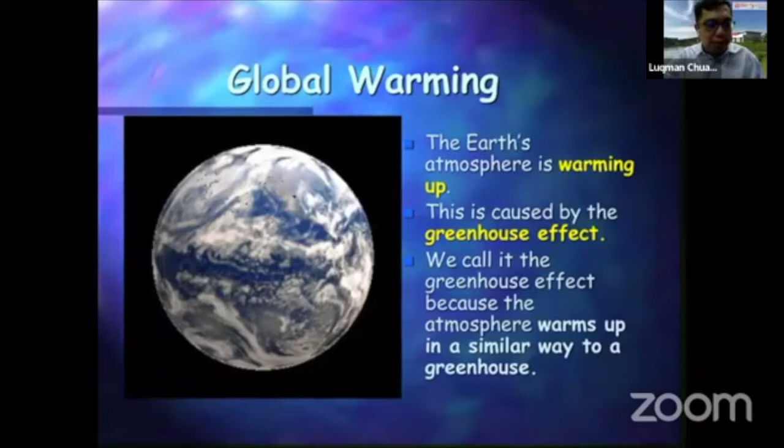For the last 100 years, icebergs seldom melted. But now the rate of melting in Antarctica and the Arctic is faster than we can imagine. It's predicted that in the next 50 years, we might not have any ice during summer in the Antarctic and Arctic areas. This is quite worrying.

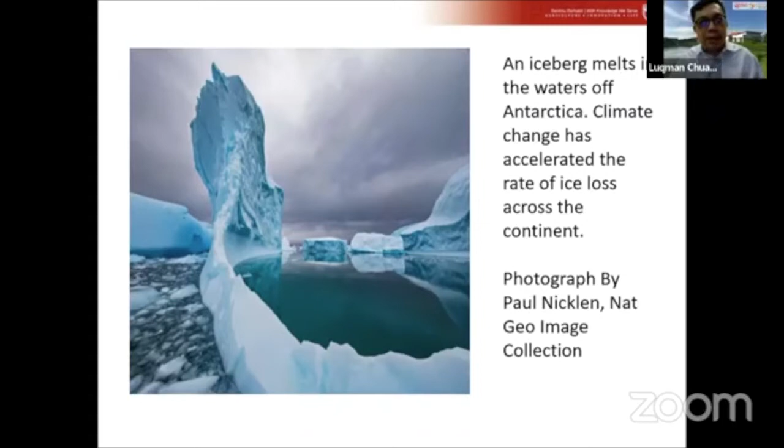This picture also shows that in the high plains of Bolivia, a man surveys the remains of what was the country's second largest lake. You can see it's completely dried out. Lake Poopó dried out due to drought and management issues.

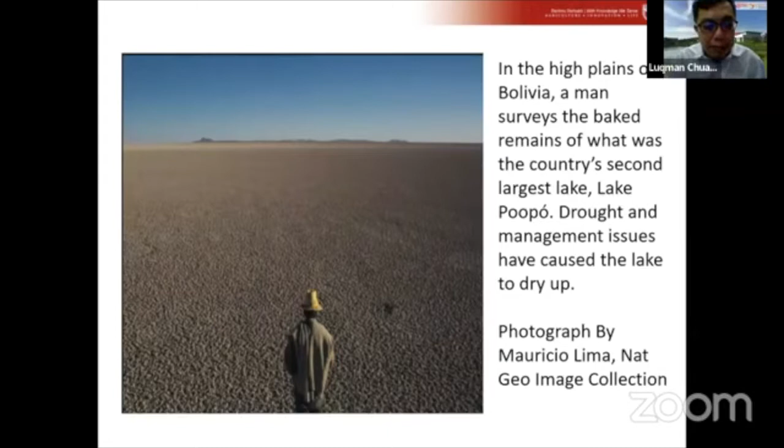I always like to share this with my students when teaching atmospheric risk management courses. You can see climate change impacting the flora and fauna in the Arctic. Although scientists don't know specifically what killed this individual polar bear, experts warn that many bears are having trouble finding food as sea ice historically relied upon melts earlier.

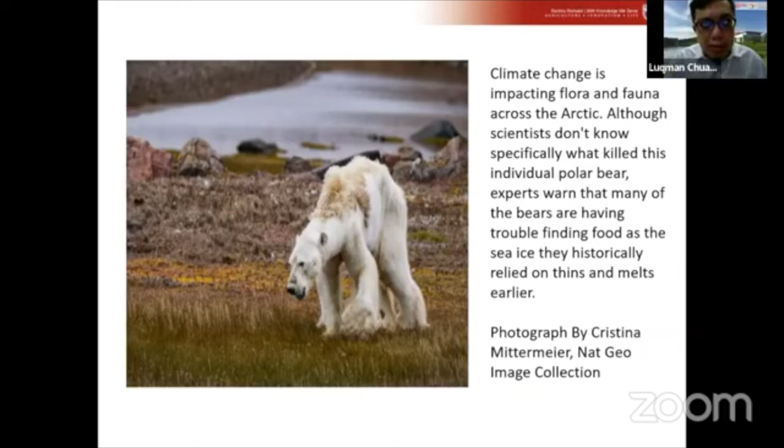I think the food shortage not only affects animals, but in the future might also affect mankind. We are in trouble if we don't try to do something for Mother Earth. Other than that, forest fires, long droughts, and super cyclones are all caused by global warming and climate change.

These things give us a warning, ringing a bell that we should conserve our environment, especially by reducing carbon dioxide emissions to reduce the effect of global warming.

So my focus today is on the aerospace industry, an industry that also contributes hugely to carbon dioxide emissions. As general background, the aerospace industry is a gigantic sector which supports nearly 62.7 million jobs, directly or indirectly, and generates about $2.7 trillion in gross domestic product.

It's also forecasted that the aerospace industry will support more than 99 million jobs, direct and indirect, with GDP estimated at about 5.9 trillion in the next two decades. Of course, if we account for the effect caused by COVID-19, it might be slowed down at the moment, but if things return to normal, this is what we forecast will happen.

So let's look at our area, the Asia Pacific region. It's at about 6% compound annual growth rate between 2018 to 2037, estimated by a study from Airbus.

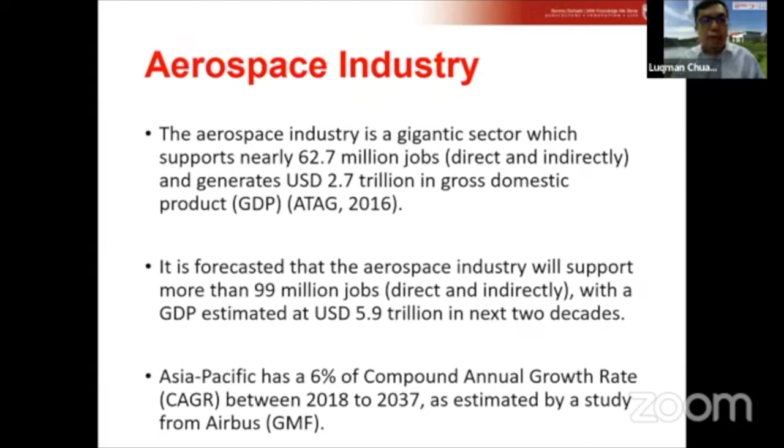Here, the picture shows the air traffic data on revenue passenger kilometers over time, with future predictions by Airbus. Air traffic is expected to double in the next 15 years, and over 20 years, an annual traffic growth of 4.8% is predicted, so the industry will keep growing and booming in the future, with more people using air traffic as a mode of transportation.

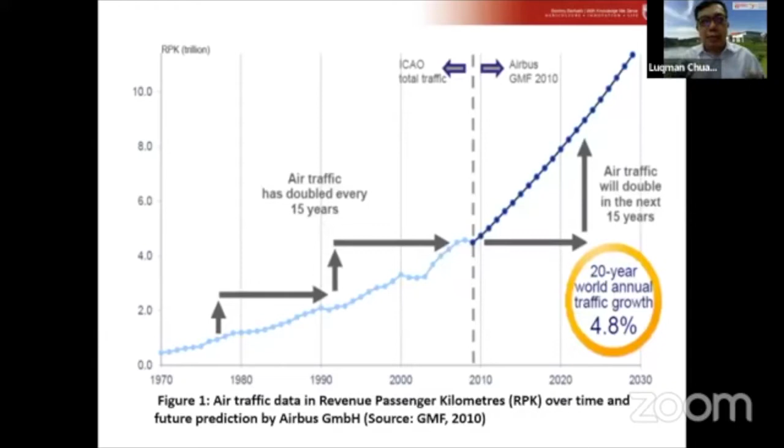What about the Malaysia scenario? For Malaysia, the strengthening of its manufacturing supply chain and maintenance services are undergoing transformation with Industry 4.0 as a catalyst. However, environmental accountability still lags behind in the Malaysian aerospace industry, even with the tremendous growth due to low-cost carriers such as AirAsia, Firefly, Tiger Airways, Malindo, and Jetstar. This is a concerning issue because as Malaysians, the industry and public still lack awareness of the environmental impact caused by the aviation industry.

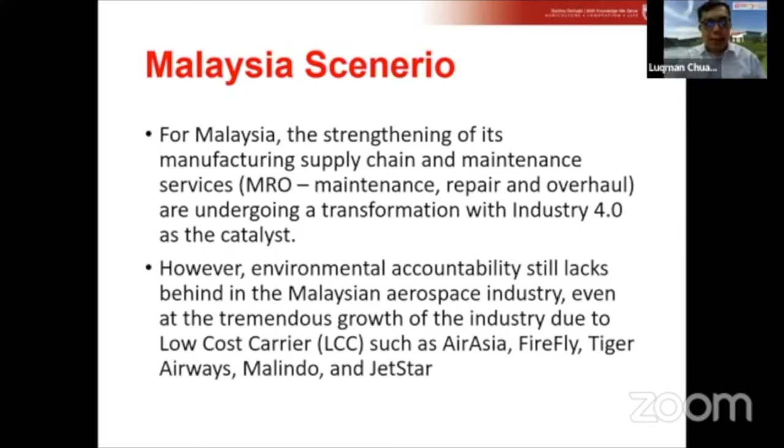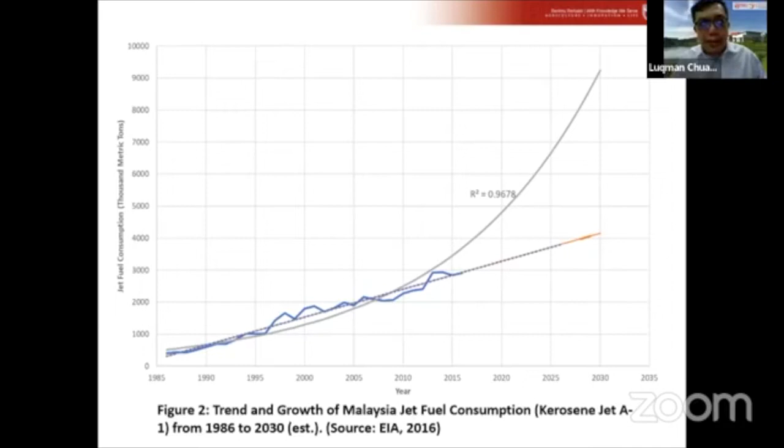So what's the relationship between the aviation industry and carbon emission? Aviation accounts for roughly about 2% of man-made carbon emissions globally. Global production of aviation fuel, particularly kerosene Jet A1, had a market presence of 80 billion gallons per year, or 302.8 billion liters per year.

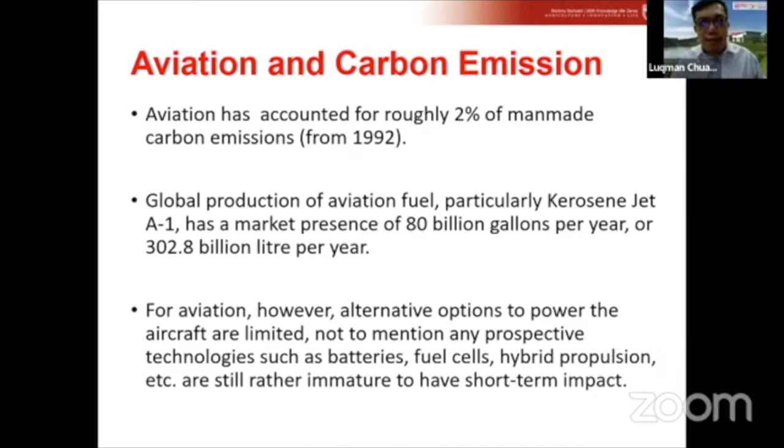For aviation, however, alternative options to power the aircraft are limited. This is sad news, we don't have much choice, we have to use fossil fuel. Not to mention prospective technologies such as batteries, fuel cells, hybrid propulsion, and so on, which are still rather immature to have a short-term impact. There's a lot of research working on that, such as fuel cells using hydrogen power, batteries, and hybrid propulsion. However, this technology is still under development and in the R&D stage. It's not established or mature enough to totally replace conventional fossil fuel, the conventional jet fuel which is kerosene.

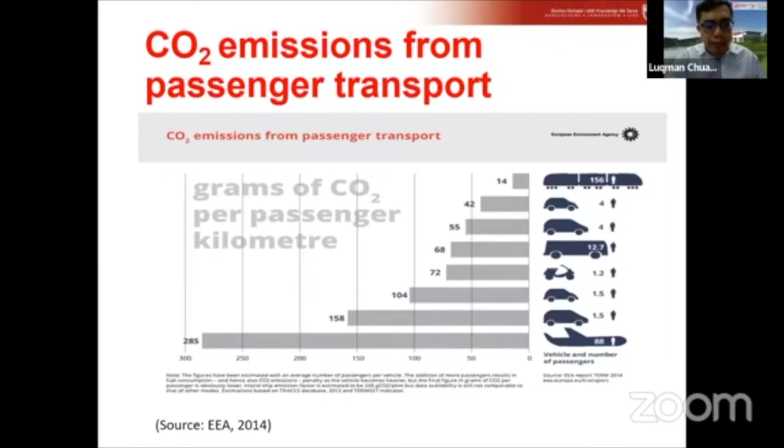So carbon offsetting and reduction scheme for international aviation, simply called CORSIA, is a global initiative by the United Nations to address and offset aviation emissions through offset credit and allowance from an emission trading scheme. Malaysia has pledged itself toward CORSIA, with implementation phase in 2020. This is the Malaysian initiative trying to cut down carbon emissions in the aviation industry. Malaysia has joined force in CORSIA trying to reduce carbon emission, and it's imperative that Malaysia have offset credit to address aviation emission.

One such credit gain could be the utilization of BioJet fuel. It is obliged by the Malaysian government, especially to address the issue of carbon emission by the aviation industry. So one of the measures that the Malaysian government can take is to utilize BioJet fuel to replace the conventional fossil fuel, kerosene, which is used on the airplane.

So basically, there are some challenges to aviation jet fuel. During the Aviation and Environment Summit organized by the Air Transport Action Group in 2008, aviation leaders across the globe committed to an industrial long-term plan to improve its carbon footprint. That's not new, the aviation industry has had attention on the carbon footprint produced by the airplane and the aviation industry. Leaders of the aviation industry came together to discuss solutions and measures they can take to reduce carbon emission. The aviation carbon dioxide roadmap pledged the aviation industry to reduce emission of carbon dioxide, nitrogen oxide, and noise.

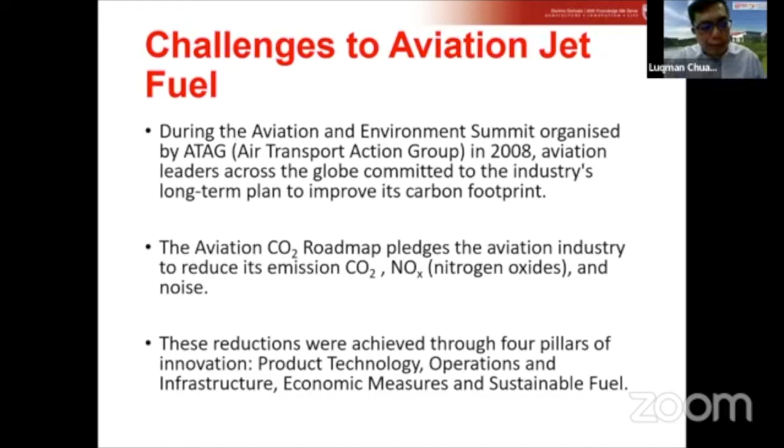Today our presentation will focus more on sustainable fuel. Here is the 4-pillar reduction roadmap.

The forecast reflects different measures and recent actions taken. So what happens to carbon reduction? As you can see, if no action is taken and it's business as usual, carbon emissions will keep rising.

Emissions are expected to reach a peak by year 2050. But if measures are taken, such as using biofuel together with other technologies,

these measures can be successful. It's predicted that we can successfully reduce carbon emissions by 50% by year 2050.

This is what we hope to see, because if we do nothing, we will leave the global temperature to increase by 2 degrees Celsius.

This is something scientists don't want to see, because a 2 degree Celsius increase will cause a lot of damage to the ecosystem and to our Mother Earth.

So we can see that it's very urgent that we need to control our carbon emissions by 2050.

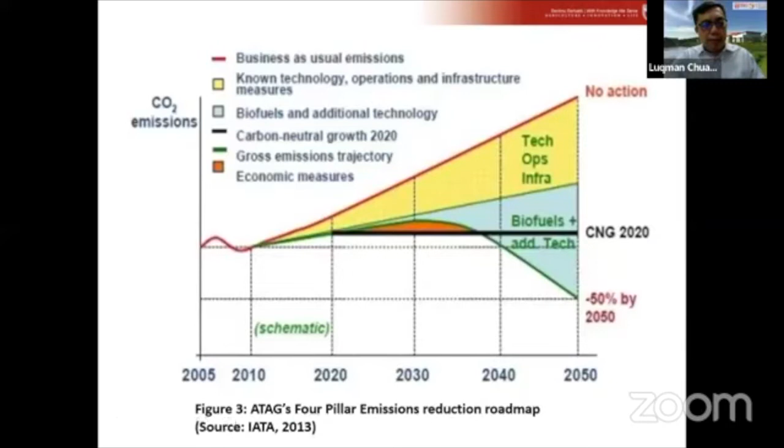Seeing that biofuel or alternative fuel might be an option to reduce carbon dioxide, it's gaining attention in the aviation industry, which is focused on replacing the current fuels used by airplanes.

The evolution from 2007 to 2017 in the biojet fuel arena can be segmented into upstream and downstream momentums. The upstream looks at biomass feedstock possible to produce biojet fuel and how this resource can be developed at mass scale.

This is very important. Unlike cars or road transportation, where fuel consumption is not as huge,

for long distance traveling, jet fuel carrying more passengers and heavier loads has huge consumption. So we have to make sure the supply and feedstock for biofuel are enough to sustain the industry.

So the upstream industry is very focused on ensuring the feedstock supply is enough to sustain the production of biojet fuel.

The upstream also looks at conditioning this feedstock to enable production of biojet fuel, including energy densification, biomass treatment, conversion to oil, conversion to intermediate products, and storage.

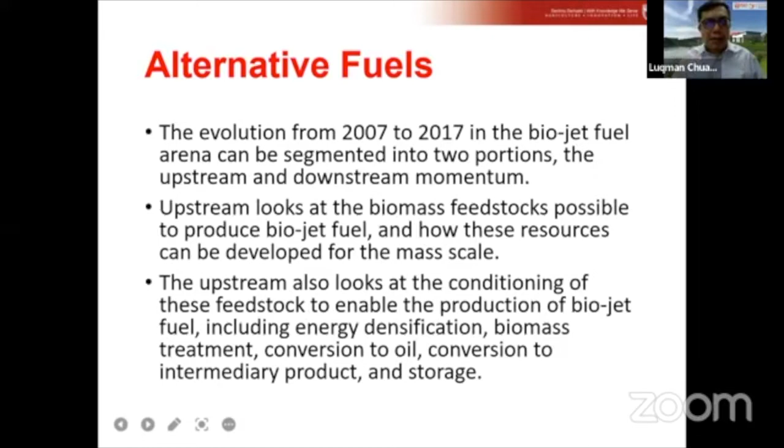For downstream, they look at oil refinery, converting intermediate products into the final form, jet fuel, along with product blending, marketing of the fuel, and certification.

Upstream ensures production of crop and biomass is enough to supply to the refinery, which converts it into jet fuel.

Downstream is more focused on conversion technology of jet fuel, and also quality control,

and certification of biojet fuel. These things are the focus of the downstream industry in biojet fuel.

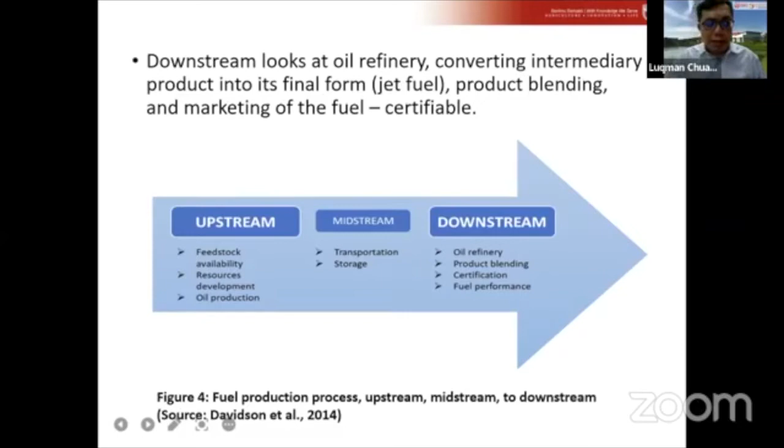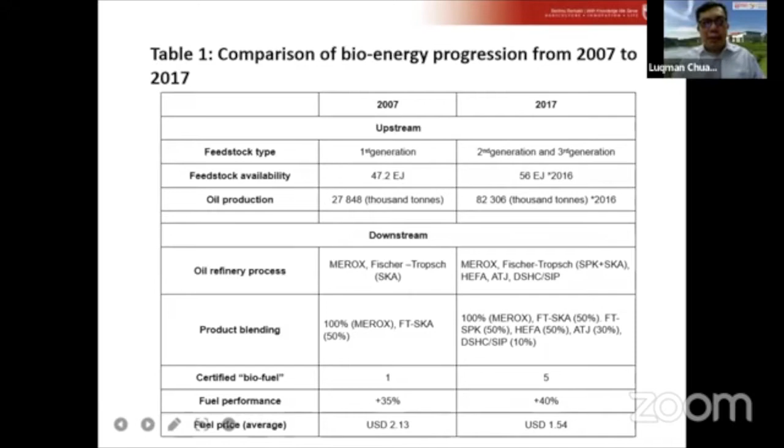Although there are currently many biojet fuels that have been developed, they also have advantages and disadvantages as compared to conventional fuel. However, this can be overcome in the future when the technology is further improved.

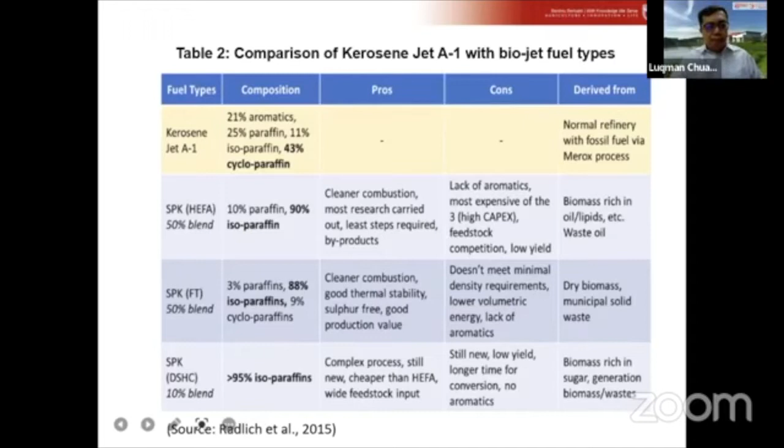These undergo the biological process. The process of conversion can go through the biological process, chemical process, thermal process, and others. More detail will be discussed in a later slide. You can take a glance that there are various alternate pathways to convert the biomass into biojet fuel.

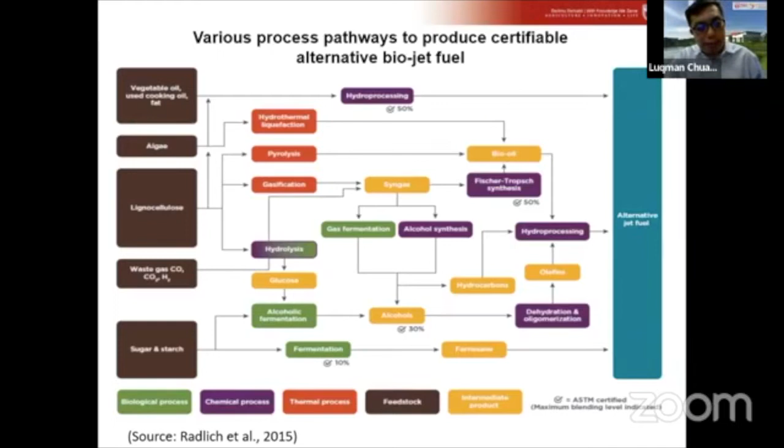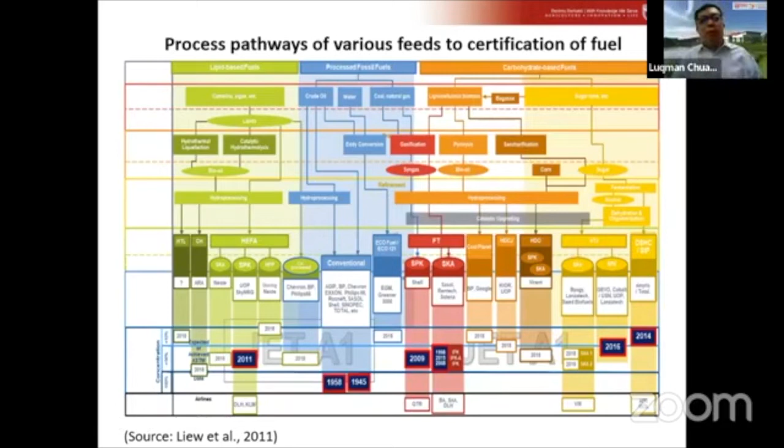This diagram shows the different processes that can produce biojet fuel. We will discuss the rest in more detail, but just to give you a general idea: there are various processes such as hydrothermal liquefaction, catalytic hydrothermolysis, eddy conversion, gasification, pyrolysis, and saccharification, which produce different types of biojet fuel.

So what is the benefit we can obtain from alternative fuel? The alternative fuel has the benefit of reducing the environmental footprint of the aviation industry, basically carbon dioxide, sulfur emission, particulate matter, and so on. It also improves flight performance, with better fuel burn efficiency and energy content.

Besides energy security and sustainability - you know that fossil fuel, the petroleum, will one day deplete. So plant-based or biomass-based fuel is more sustainable and long-lasting, which will guarantee the sustainability of the supply of biojet fuel, along with price stability compared to the depleting fossil oil reserve.

You can see that currently the oil price, due to the Ukraine war and Russia, has increased. So by replacing it with alternative fuel, we can actually bring down the dependence on fossil fuel, and indirectly bring down the price of fuel as well.

Lastly, the utilization of current standing infrastructure - the conversion to biojet fuel doesn't need to build new facilities. It can actually be based on the current facility, the current refinery plant, with just some modification, and it can be utilized to convert into biojet fuel production.

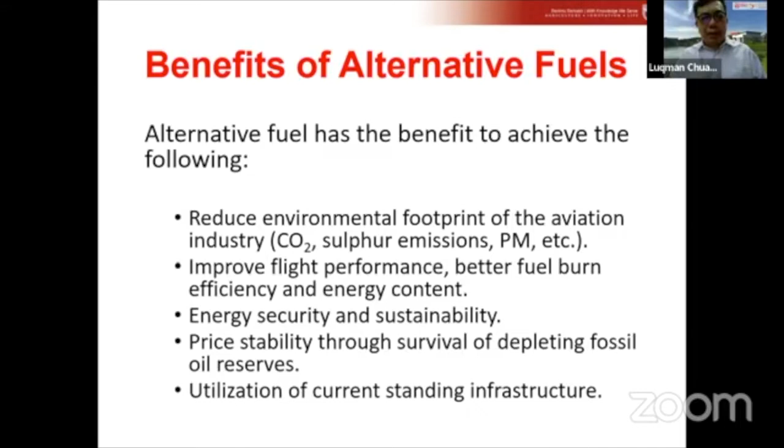This is also another advantage of using biojet fuel. We can foresee that the performance of the engine will also be improved with cleaner combustion.

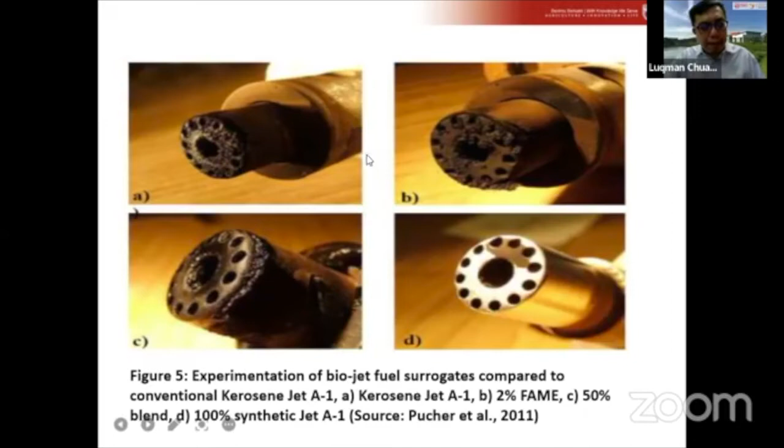Before the MCO, before the COVID-19 pandemic outbreak, AirAsia had communicated with Airbus, trying to discuss the potential of using BioJet fuel in their airplanes, because Malaysia is also bound by the Paris agreement. So AirAsia will also be affected by 2020, 2030, by how many percent of the jet fuel has to consist of BioJet fuel. So AirAsia, Malaysia Airlines, they start considering how to implement the blend of BioJet fuel into the fuel system.

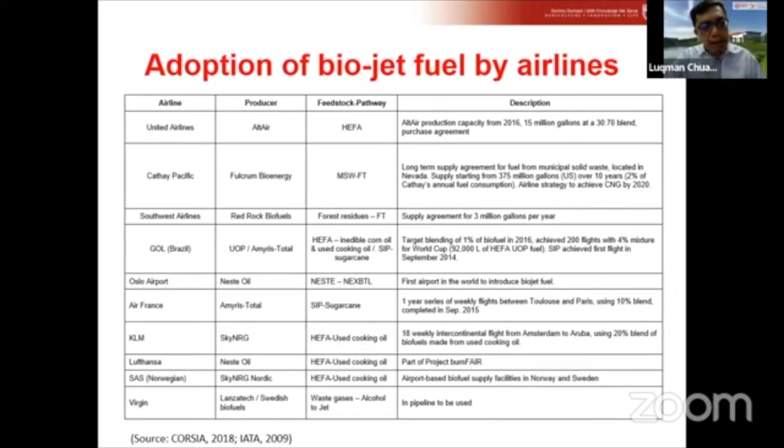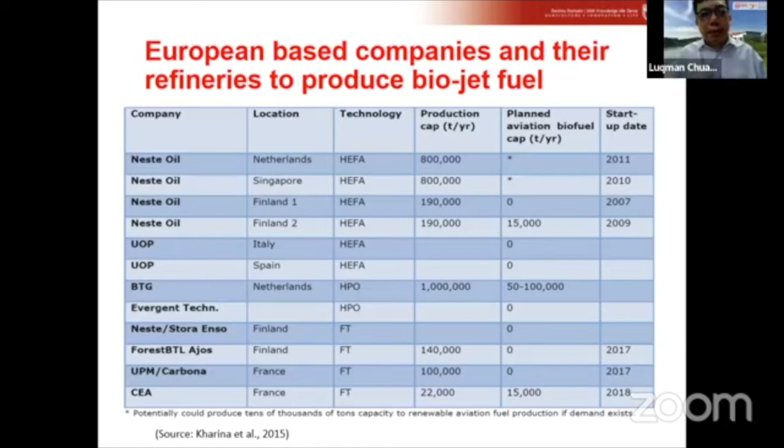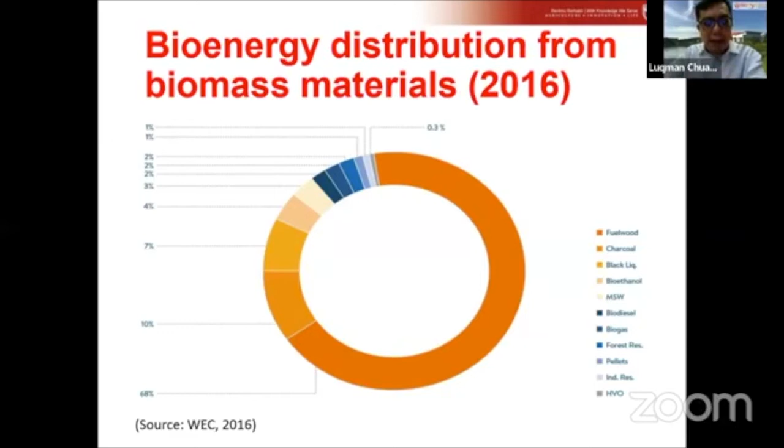But there's potential in HVO that we'll discuss later. Currently, most of the biomass feedstock consists of lignocellulose base. You can see that almost 68% of the bioenergy feedstock actually comes from fuel wood, which is lignocellulose based.

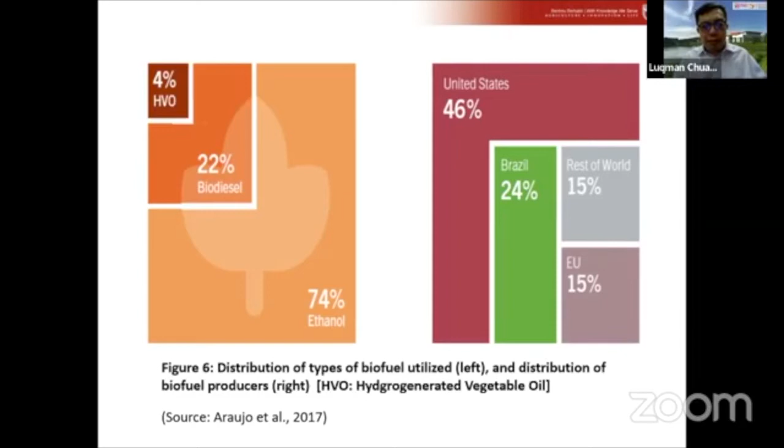This shows the distribution of the type of biofuel utilized, and the distribution of biofuel producers on the right. You can see that most of the biofuel currently utilized is ethanol, which consists of about 74% of the biofuel, and only 4% is HVO, hydrogenated vegetable oil. The United States seems to be the biggest player in utilizing biofuel energy compared to the rest of the world.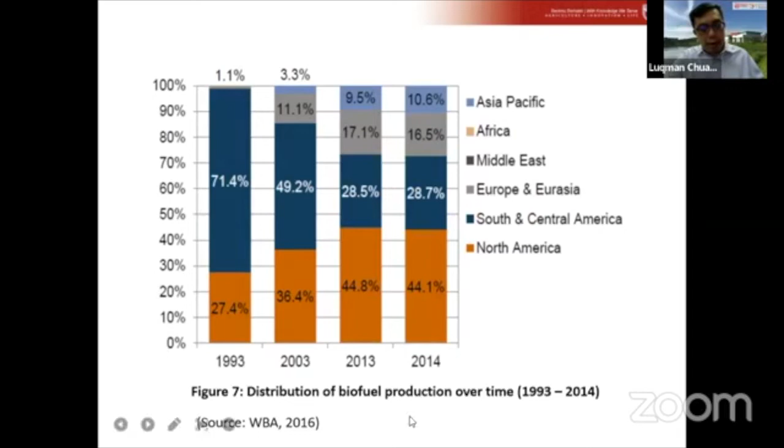So how about Malaysia? Malaysia is a country full of natural resources, so it can be assumed that Malaysia is a heaven or paradise for biomass feedstock. Biomass in Malaysia consists of various categories, such as permanent crops and trees.

This includes rubber, oil palm, coconut, cocoa, coffee, areca nut varieties, orchard; short-term crops like banana fiber, fiber crops, pineapple, paddy, grass, nursery, tobacco, sugarcane; horticulture land, mixed horticulture, vegetable, oil, herbal and spices; forest land, log piles, ex-log piles, forest residues, shrubland; and others like micro and macro algae, animal farm waste like cow dung, and municipal waste. All these are potential feedstock that can be used to convert into BioJet fuel.

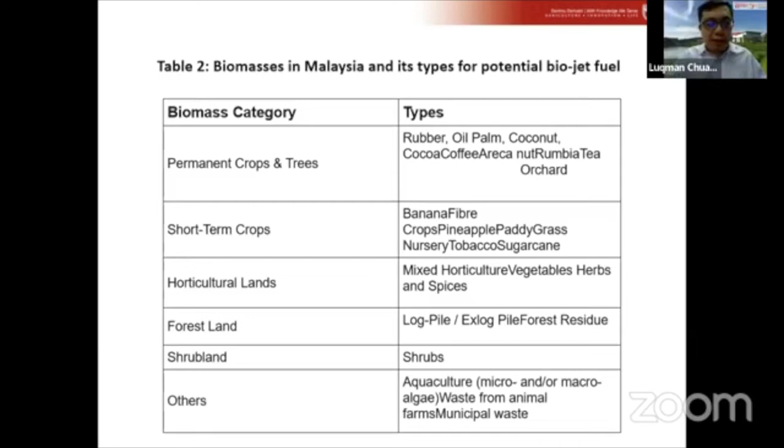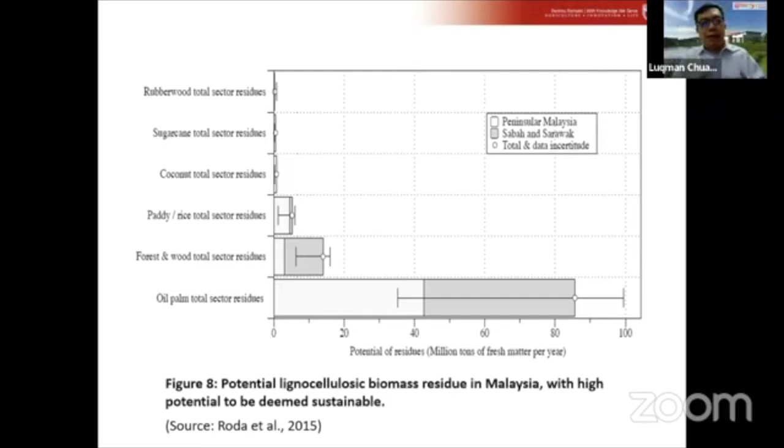So here's the diagram showing the potential lignocellulose biomass residue in Malaysia with high potential to deem sustainability. Among the biofeedstock mentioned earlier, oil palm seems to be the biggest biomass with potential to produce biofuel and bioenergy for the industry, so our focus might be on the biomass from palm oil. From the study, compared to other feedstock, the residue from the palm oil industry stands out as the highest feedstock available in Malaysia.

So we make a matrix against the sustainability criteria. We compare palm oil, forest resources, paddy, rubber, sugarcane, coconut residue, and palm oil seems to be the most promising feedstock for biofuel. They are friendly on land area because of their high yield per hectare, and they also have residue availability, government support, incentives, poverty alleviation, and much lesser logistic difficulty compared to other industries. So all these criteria make palm oil residue an ideal feedstock for bioenergy.

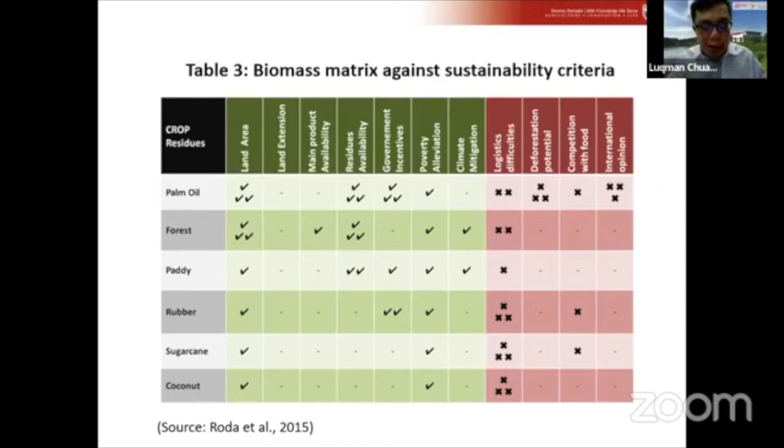It is able to compare the various sustainable local feedstocks, their respective potential of dry biomass, and the BioJet fuel potential. As you can see, oil palm seems to be the most promising because it has the highest potential biofuel production compared to other feedstocks such as rubber, sugarcane, coconut, paddy, and forest residue.

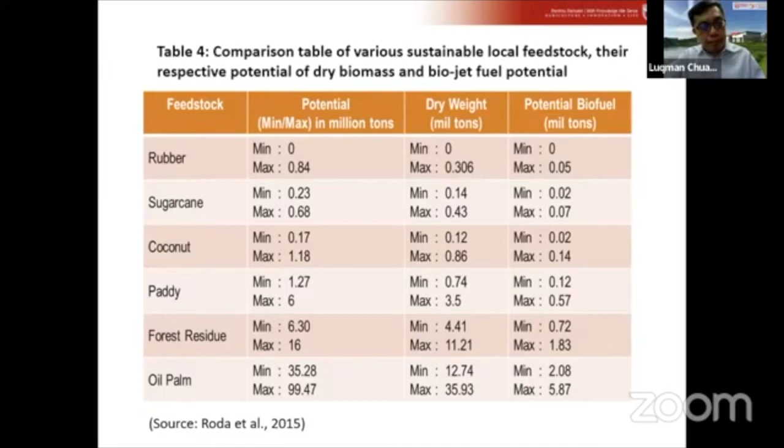Talking about liquefied fuel, here we present a selected oil and the respective yield and area required by the global fuel demand. We compare microalgae, oil palm, canola, sunflower, jatropha, and soybean.

Microalgae seems very promising since it has the highest oil yield and requires the least area for the global fuel demand compared to other feedstock. However, oil palm also stands at the second most potential feedstock for biofuel production. We will discuss these two feedstocks in the later slide.

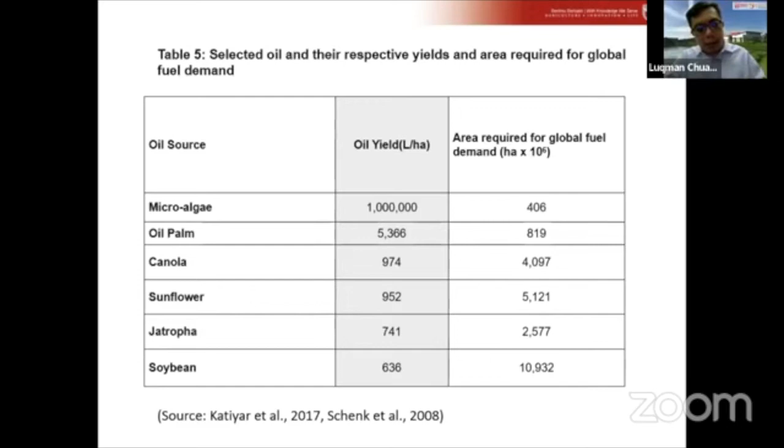Malaysia has once considered microalgae as a potential feedstock for biofuel oil. There's a lot of research carried out by University of Malaysia, TNB Research, and various research institutions on microalgae. However, most of the technology is still under development. We will discuss the limitations, pros and cons of using this feedstock.

The first generation feedstock are basically from biomass that is considered food, which is why there's the issue of biomass being used for fuel or for food. So for the second generation, we try to switch to feedstock that is non-food based. The third generation relies entirely on algae-based biofuel and bioproduct, and the fourth generation looks at non-biomass-destructive solutions such as electrofuel and photobiological solar fuel. Most of the research currently is on the second and third generation, which we can consider relatively more matured compared to the fourth generation fuel.

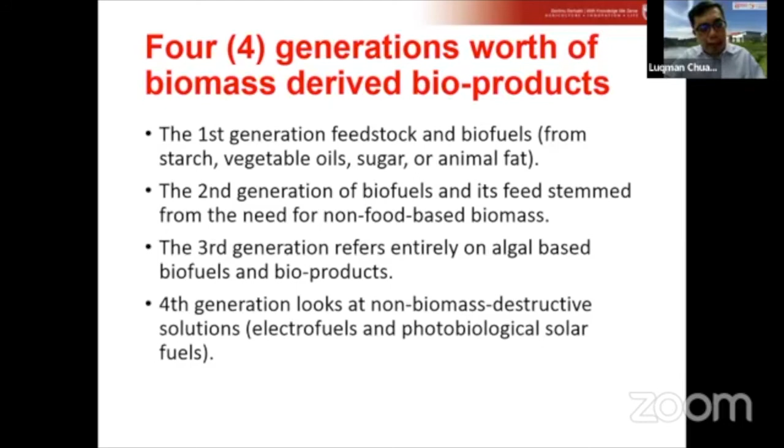So first generation accounts for the rise in food and animal feed prices, has a negative impact on biodiversity, and also competes for water due to the size of land required for the crop to grow. For the second generation, it provides an alternative to the food versus fuel debate. However, it has its own issues to address, such as the extraction process from biomass like sugar, which is locked by lignin, hemicellulose, and cellulose.

For the third generation, or algae-derived fuel, the major disadvantage is the requirement of large-scale industrialization of the algae plant, with other disadvantages involving the balance between product for fuel and high-value co-products, and harvesting, dewatering, and extraction cost of the oil for the algae. So each generation of feedstock has its own limitations.

They also have the advantage and the limitation to each of them. So our focus is more on the second generation. Although the third generation algae and microalgae seem to be a promising feedstock, however, considering the high cost and competition of the value products that can be extracted from the algae, it's not the current consideration to make use of microalgae.

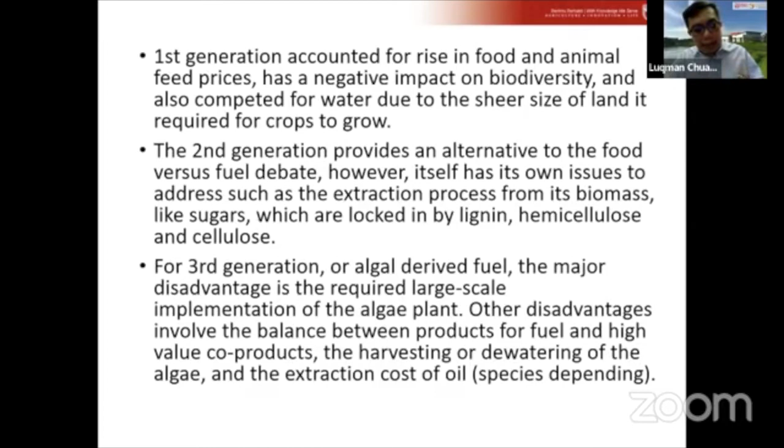Because they are also still facing some technical difficulty to extract the oil, to ensure that the harvesting process can be successfully implemented.

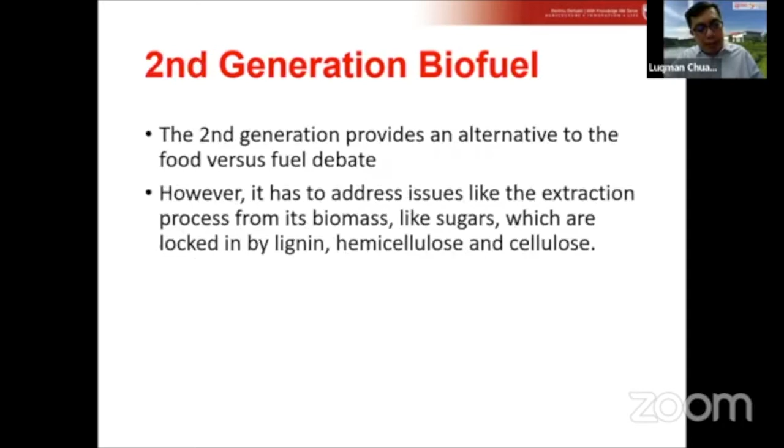So first generation accounts for the rise in food and animal feedstock competition. They have negative impact, this one we already mentioned. So basically this is the pathway of the biomass product.

So we have seen the challenges faced by the aviation industry by using BioJet fuel. So how about the potential conversion pathway? The conversion pathway means converting the feedstock into an intermediate product, then into the product, which is BioJet fuel. This consists of the feedstock, basically from crops or crop residues, to produce an intermediate product such as sugar, biofuel, bio-oil, and intermediate chemical, then as an end product, the BioJet fuel or other chemicals.

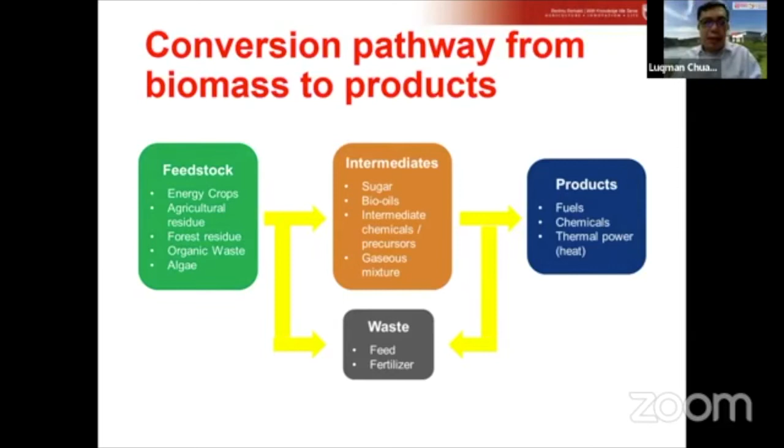So basically there are two major conversion pathways. One is biochemical, and secondly, thermochemical conversion.

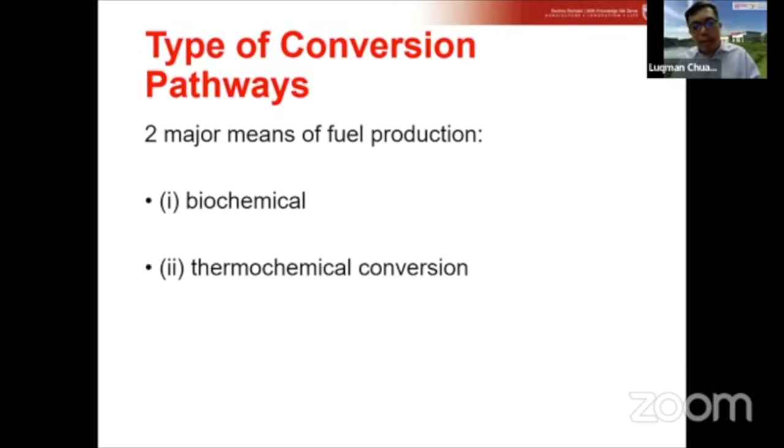Biochemical conversion involves the use of biological agents, usually naturally occurring microorganisms, to convert biomass organic components into liquid fuel, transportation fuel, and gaseous fuel. The common biochemical conversion is fermentation for ethanol, which is basically the first generation technology. In the very early stage of biofuel, people were converting crops such as corn into bioethanol. These are the very early stages of biofuel.

Biomass residue first undergoes hydrolysis or saccharification to convert the cellulose component into simple sugar. Enzyme and/or yeast are then added to convert the sugar into ethanol. So this is a very first generation technology.

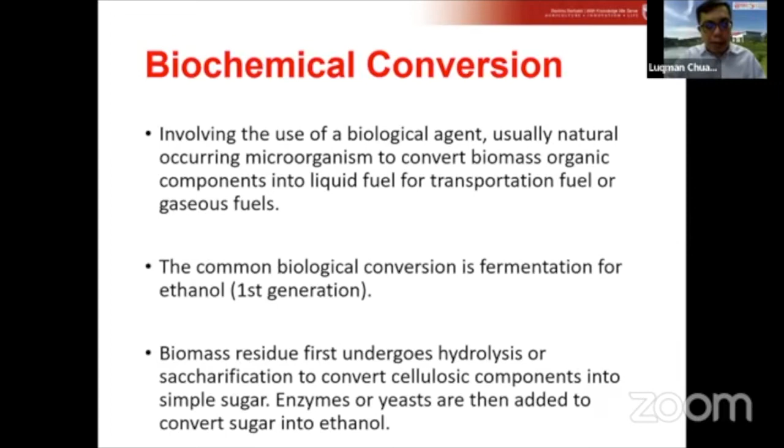We will go through the biochemical conversion process. Basically, the process consists of lignocellulose - the fiber, the plant fiber, the crop fiber - which can actually be converted through pre-treatment: washing, separating, pulping, then extracting the lignin and also extracting the cellulose. They then go through the hydrolysis process by enzyme or bacteria, converting into sugar. Then the sugar will further ferment into ethanol, bioethanol, biomethanol, or other products. So these are basically the process, the description of the process.

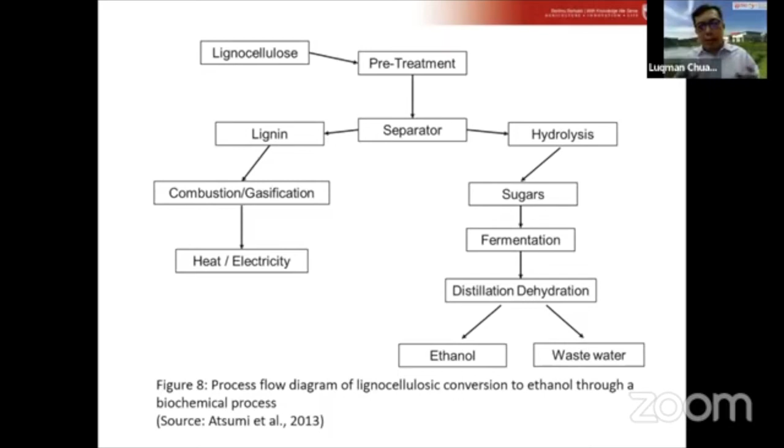The other conversion process is thermochemical, involving the process of subjecting biomass residue to elevated temperature, an irreversible reaction where biomass components are converted into various high energy components in the form of solid, liquid, and gaseous. This process can consist of pyrolysis, which converts the biomass with heat into charcoal, gas, and oil, which is also fuel. Or it can go through the gasification process where biomass is gasified under limited oxygen supply, made into fuel gas and/or syngas for the combustion process later. Or it goes through the combustion process where hot combusted product will be produced. So this is the conventional pathway to produce biofuel.

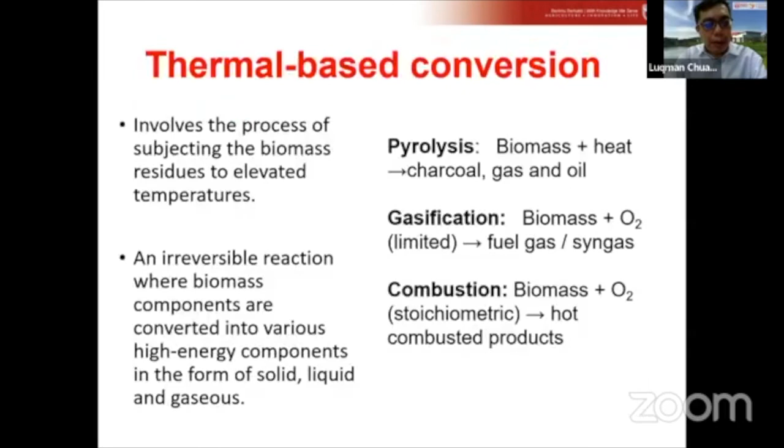Before we study the potential pathway, we first look into the criteria requested by CORSIA sustainability. So what are the CORSIA sustainability criteria for CORSIA eligible fuel? Before we need to produce BioJet fuel which fulfills the requirement under the CORSIA agreement, we first need to understand what aspects are highlighted by CORSIA for BioJet fuel.

The technical design criteria consist of high-performance fuel that can withstand a wide range of operating conditions, and also fuel that can meet the characteristics of conventional jet fuel for aviation with no requirement for different airframe, engine, or logistic infrastructure - a drop-in fuel, meaning you can directly use the fuel in the engine without major modification. Also the fuel must meet or exceed current jet fuel specifications, ASTM D1655 and ASTM D7566.

For the sustainability design criteria, it consists of life cycle greenhouse gas emission reduction, so they have to make sure there's a reduction in greenhouse gas in the long term. Also limited freshwater requirement and no competition with needed food production. From here, you can see that the first generation feedstock will be phased out because they face competition with food. So the focus will be more on the second generation or third generation feedstock.

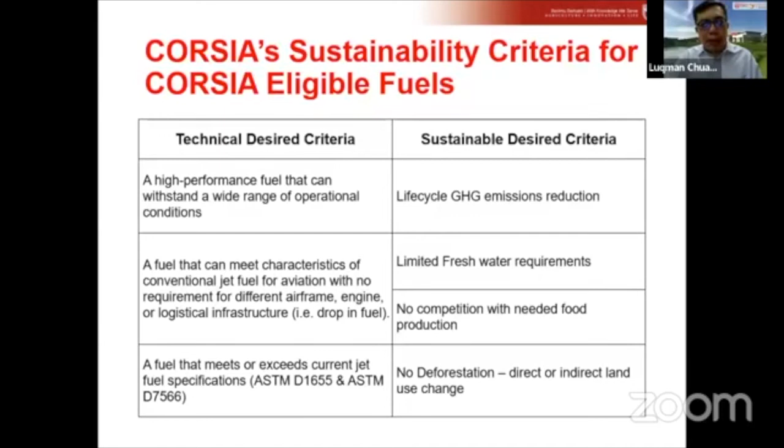I would like to present the 4 potential pathways to produce aviation turbine jet fuel. Before we determine which pathway is most suitable for biojet fuel to be utilized in Malaysia, I would like to introduce the 4 pathways that can convert to biojet fuel. First is Fischer-Tropsch, followed by hydroprocessed ester and fatty acid, or HEFA, sugar to synthetic iso-paraffin (SIP), and alcohol to jet (ATJ). These are the conversion pathways to biojet fuel currently available for production.

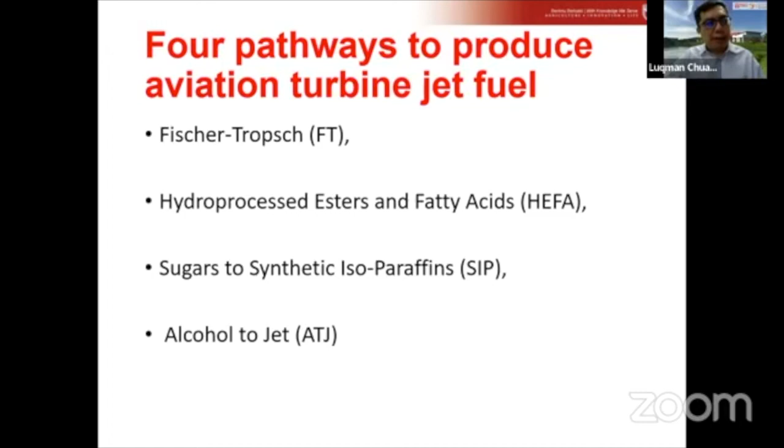Hydroprocessed ester and fatty acid, or HEFA, was approved in July 2011 under ASTM D7566 for use up to 50% of volume in blend with conventional kerosene jet fuel. This is a tested and proven method approved by ASTM, the American Society for Testing and Materials Standard. The input feedstock of HEFA is mainly based on lipid-based feedstock, such as vegetable oil, animal oil, cooking oil, and etc.

An advantage of this process is it can be easily integrated into the current oil refining process. Integration into the oil refinery will ease the market entry point from a price, return of investment, speed, and reliability perspective, making it highly economical. This is good news for industry players, because they don't need a big investment, since they can use current facilities to convert feedstock into biojet fuel. This means they can have a more competitive price, more profit, and faster return of investment. This is encouraging news for biojet fuel manufacturers.

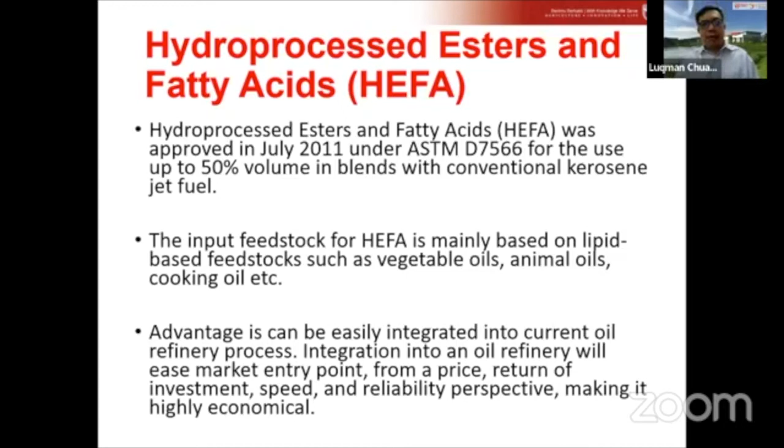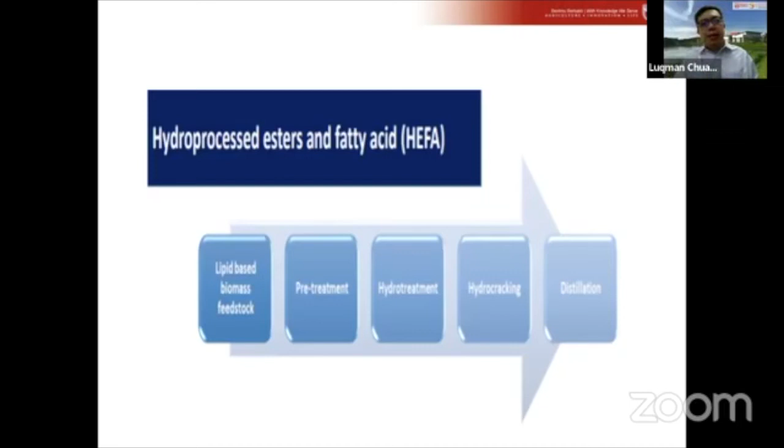So how about the other technology? Here is a basic diagram showing the pathway of HEFA. Basically, the lipid-based biomass feedstock using oil and fat will undergo pre-treatment, such as degumming, followed by hydro treatment, hydrocracking, and then distillation to produce jet fuel.

Fischer-Tropsch is a technology usually used in oil refineries, especially in the petroleum cracking process. However, it is also utilized in biojet fuel production. The Fischer-Tropsch conversion process was approved in September 2009 under ASTM D7566 for commercial use at 50% blend with conventional kerosene jet fuel across the world. This is another approved method for biojet fuel production.

Fischer-Tropsch fuels are known as Fischer-Tropsch synthetic paraffin kerosene, or Fischer-Tropsch synthetic paraffin kerosene with aromatics. As pyrolysis does not yield the desired liquid fuel, most of the Fischer-Tropsch process for fuel is done with gasification of coal, natural gas, and biomass feedstock. In this process, the feedstock is slightly different compared to HEFA. The feedstock basically consists of solid or gaseous feedstock, as compared to HEFA, which uses liquid feedstock.

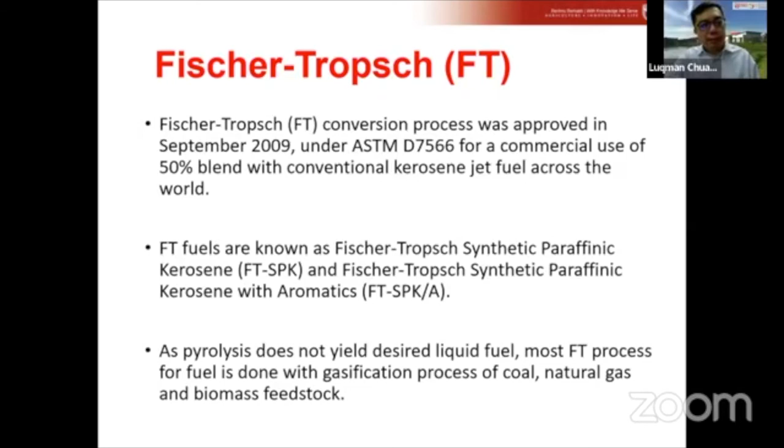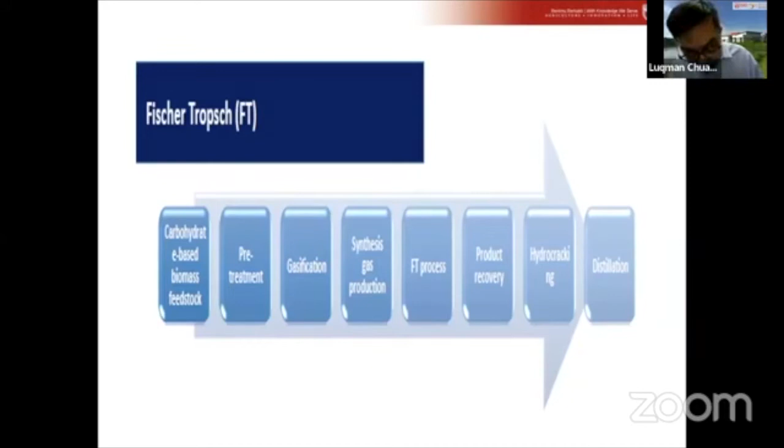This is the route of the Fischer-Tropsch process. The carbohydrate-based biomass feedstock will undergo pre-treatment, then gasification to produce synthetic gas, or syngas, then the Fischer-Tropsch process, then product recovery and hydrocracking, then distillation. The last few stages are quite similar to HEFA.

ATJ, or alcohol to jet, was approved under ASTM D7566 in 2018 recently. It was initially approved for 30% and revised to be approved up to a blend ratio of 50% with conventional jet fuel. One of the key benefits of ATJ is that it can convert any low-cost, locally available feedstock into ethanol. This is the advantage of ATJ.

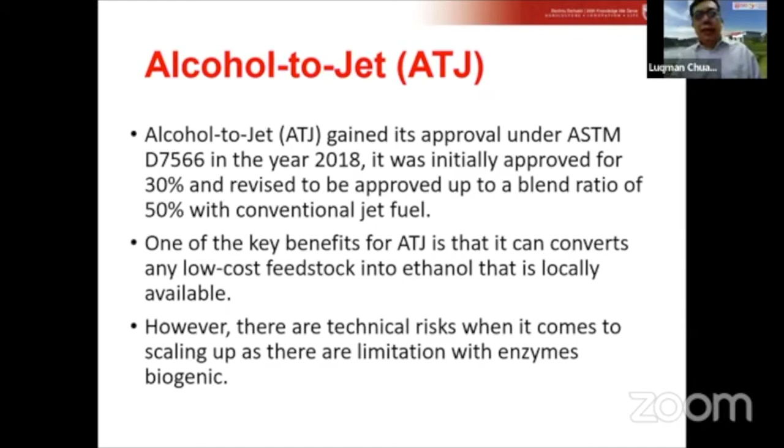However, there are technical risks when it comes to scaling up, as there are limitations with enzymes biogenic. When it involves the bioprocess, it can be a bit complicated, though biological processes also have the advantage of being more environmentally friendly. However, the disadvantage is that it might be more complicated and very much influenced by the surrounding pH and temperature, and might take longer time for production. These are some of the disadvantages of using the biological process.

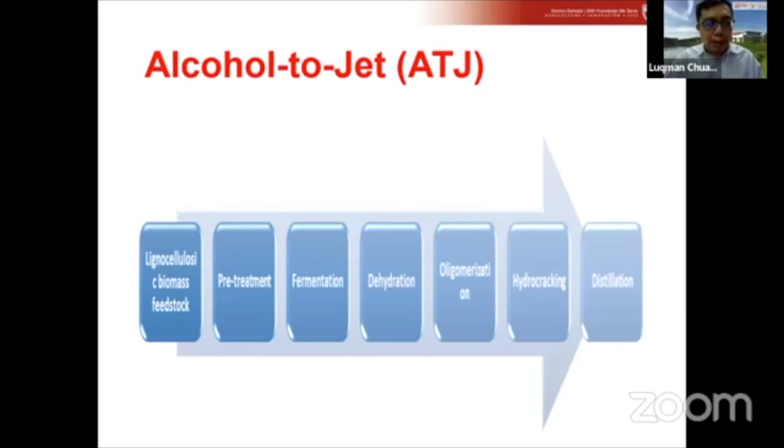Then the last process, hydroprocessing fermented sugar to synthetic isoparaffin, SIP. SIP is a biochemical conversion pathway done through sugar fermentation, where the intermediate known as farnesene. It is the only biochemical conversion that is certified today. SIP was first developed by Amyris, now under Total, known as direct sugar to hydrocarbon.

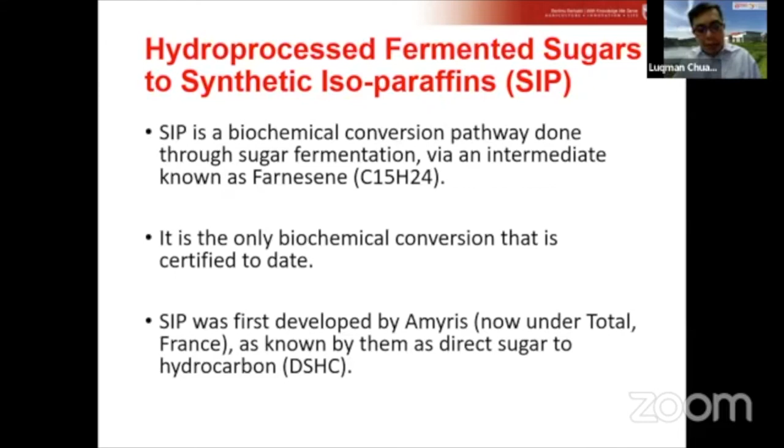So this is the SIP process. The lignocellulose biomass feedstock will undergo pre-treatment, fermentation, separation and purification process, hydroprocessing and distillation. So as compared to ATJ, the process is more directly involved in the biochemical conversion.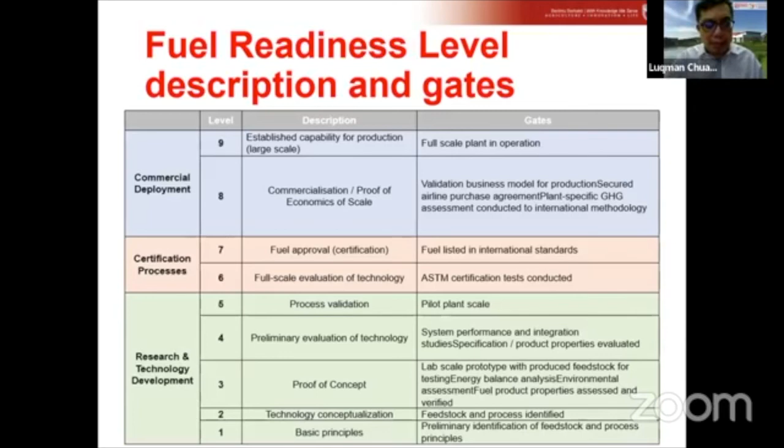So you can see from here that among the 4 commercial pathways, the fuel readiness level for the 4 processes seems to be still mainly under the R&D stage to the technology proven stage, still very much below the stage of commercial ready. The alcohol to jet is also under the technology proven stage.

Also, compared to these 2 technologies, SIP has the problem of resource availability. However, the alcohol to jet has the advantage that abundant resources are more available. However, the technology is still under the proven stage, not yet ready for commercial scale-up.

So that leaves only 2 technologies, which are HEFA and also Fischer-Tropsch. These 2 technologies are more proven, actually closer to the conventional fuel production pathway. So they are more commercial ready as compared to the other 2 technologies available for biojet fuel. So our focus will be more on this HEFA and Fischer-Tropsch process.

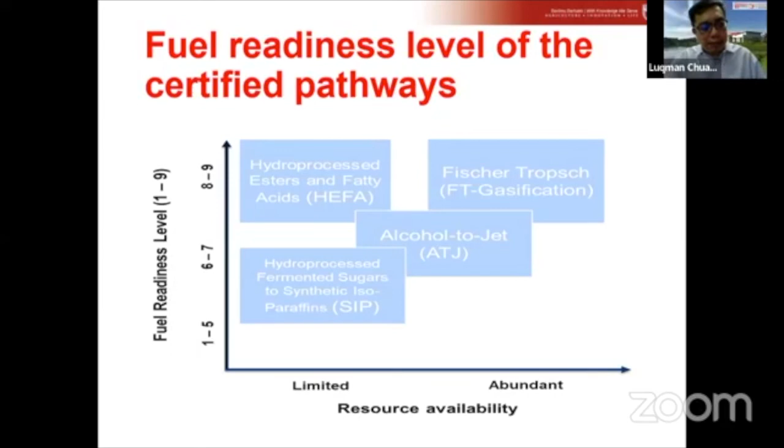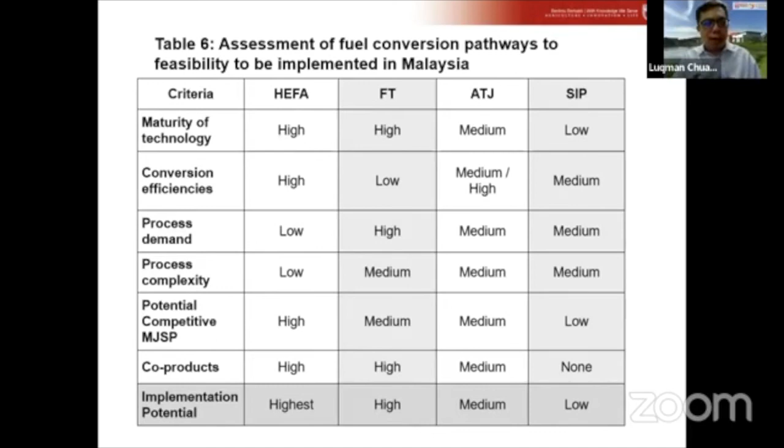So as a conclusion of the assessment, we can see that HEFA and Fischer-Tropsch are the 2 most mature processes to be implemented in Malaysia, whether through Malaysia's own technology development in-country capacity, or importing the technology into Malaysia from foreign investment, either by own technology development or transfer of technology.

For the Fischer-Tropsch route, there will be insufficient sustainable lignocellulose biomass, even including palm oil derived residue. Yeah, some might say that we have a lot of abundant empty fruit bunch, a lot of abundant sugar bagasse or something, but from our analysis, we still find it insufficient.

We still found that the feedstock is far below what can sustain the production of BioJet fuel in Malaysia. We have done a study, which we are not presenting today, on the Malaysia biomass feedstock, including all the solid residue from the palm oil industry, sugarcane, rubber, forest residue, and wood stock. We found that even all those so-called solid fuel or solid feedstock are not able to sustain the production of BioJet fuel. They cannot supply enough lignocellulose for conversion into sugar, then bioethanol or BioJet fuel.